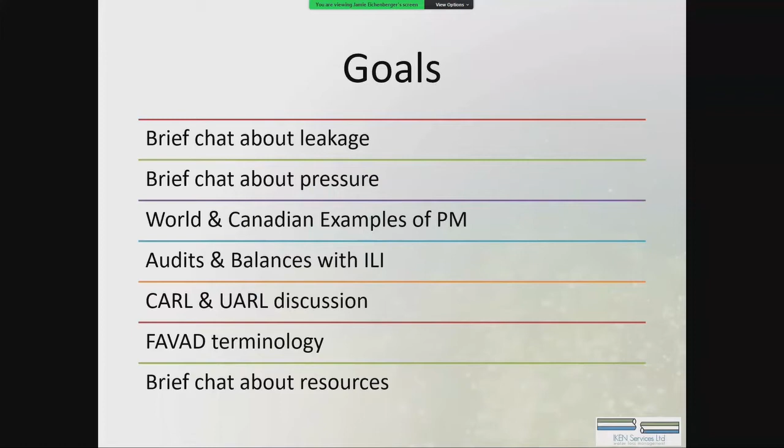CARL and UARL, again, more acronyms. If you look at your handout, I've given everybody a cheat sheet so you can follow along if I start talking too quickly. FAVAD we'll get to, as I say, a little later into the conversation. At the end, I've got a list of resources that I think you'll find quite helpful. I'm going to try and fly through this as quickly as I can. So instead of us having a bunch of question and answer throughout, maybe we'll just go to a midpoint or an endpoint and cover off questions.

So let's quickly look at leakage and try and understand what we're talking about. Generally speaking, if we're looking at a consultant like myself, we're usually talking about underground pipeline leak detection. What I want to point out is above ground, below ground, large leak or small leak, it all falls into a category of leakage. Whether they're findable or unfindable often depends not only on the user, but usually the equipment or the materials we're working with. And it gets very complicated with the new materials we're sticking in the ground.

There is argument about naturally occurring and man-made leakage, and regardless, leakage is leakage. But what we are finding is that there are examples of poorly installed or improperly installed pipe, and there's also a lot to be said for some naturally occurring situations.

I remember a project in Manitoba and Winnipeg in the middle of winter. The cast iron water mains had the frost go quite a ways past it. And as the frost worked its way out of the ground, it was creating something in the neighborhood of 400 leaks a month in the early spring. Frost heaving pipe out of the ground. Those leaks were usually easy to find because the back of the cast iron was breaking.

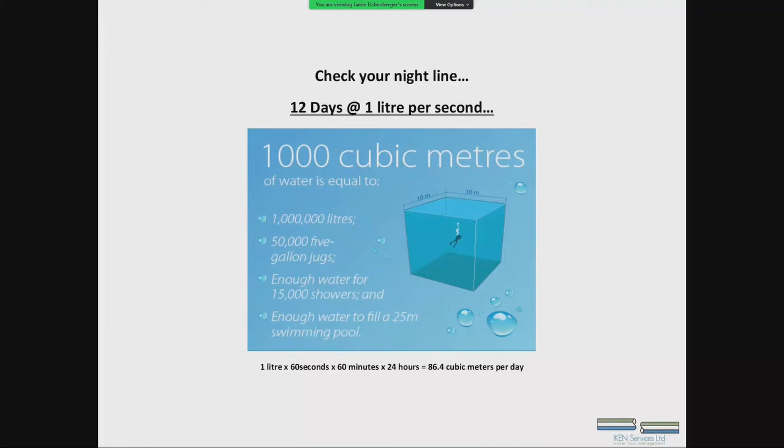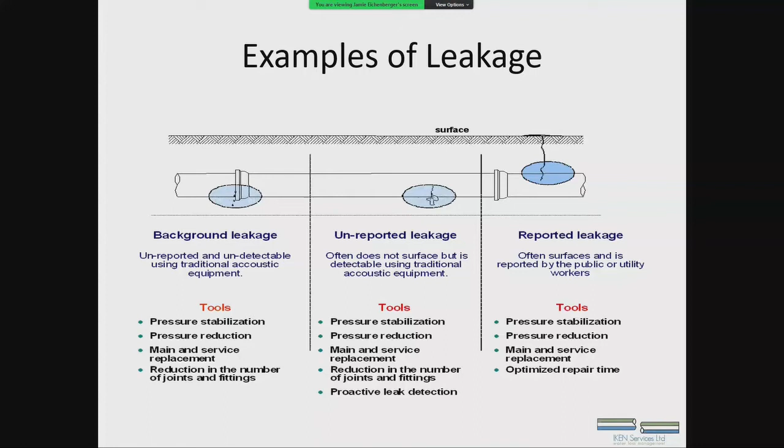If you take a look at the tools we have at the bottom to go at mitigation, in every instance, if we do some work with pressure, we're going to gain some ground on all categories of leakage. That's important to remember throughout this presentation. Thanks.

We often have in North America a fairly robust pressure goal, and oftentimes it's satisfying fire flow requirements and making sure that the pressure at the mayor's house is really good for a shower.

How much is too much? How much is a problem? How much is too little? And how do we control this pressure?

I know that in North Vancouver, we had some zones that were, I believe, 40 PSI at the top, and almost 130 PSI at the bottom. Big hillside communities are going to have to wrestle with that because their head pressure gets overwhelming. In Gold River, we had a couple of spots up by the water tower that were down below 40 PSI, and they needed to put booster stations in to keep people happy up there. Their system was controlled anywhere from 40 to 120 PSI. They had one small district down at the river at the bottom that had a PRV and did restrict pressures into their commercial district, but for the most part it was all head pressure off the reservoir.

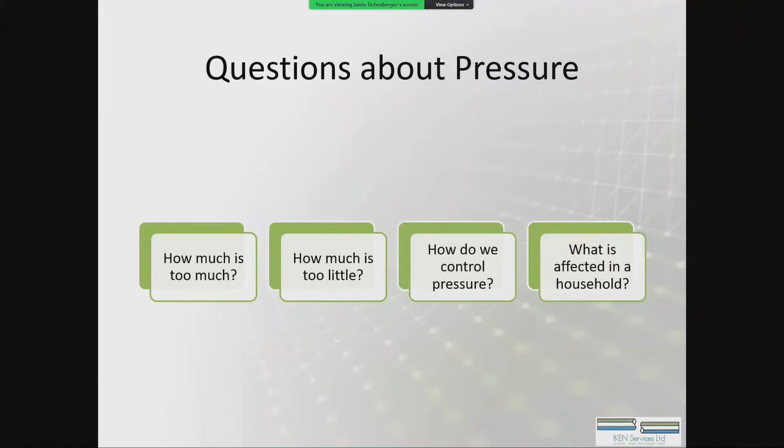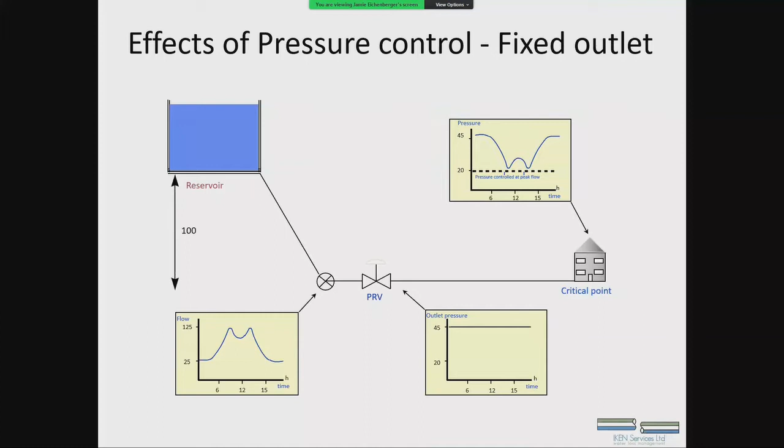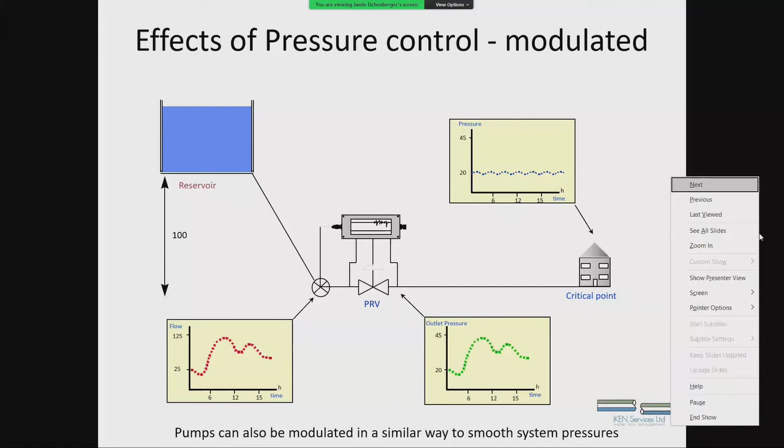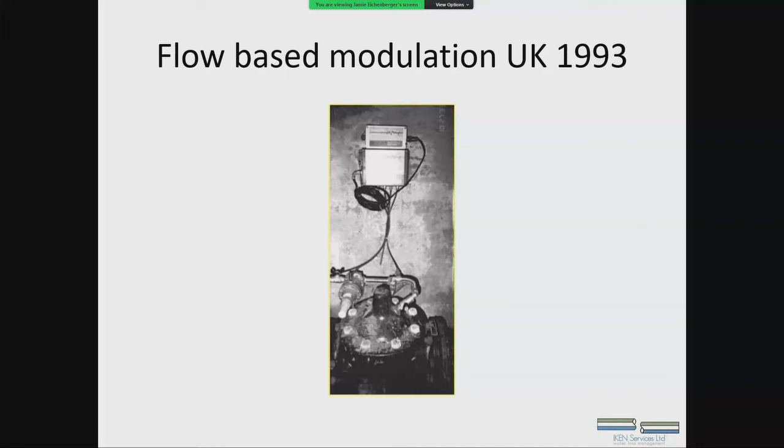I wanted to give you some history on this. Back in the late 80s, early 90s, the UK went through a multiple year drought, and they ended up privatizing the water systems. It turned out they had about 5 major water companies created, Thames Water, and what's the name of the other ones? I'm struggling to remember them, but they were trucking water to reservoirs because the systems were leaking so badly they couldn't supply water to every street all the time. When they privatized, they started looking at any alternatives they had to solve the problem, and the first thing they went after was turning the pressure down in the overall system.

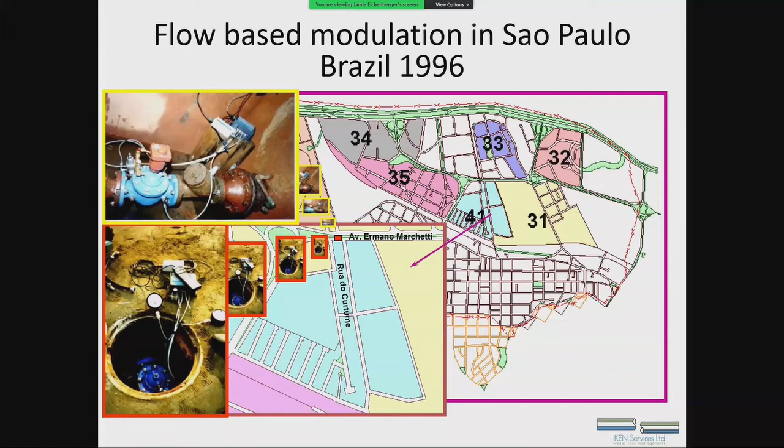The technology ran around the world, and we started putting controllers on a lot of PRVs. In some cases, Brazil for example, they had an astronomical amount of leakage, and they started applying these newfound technologies in a lot of their systems. One fellow I'd worked with at a consulting firm in Canada was a fellow by the name of Julian Thornton. These are some of his slides that I've borrowed, showing some of the work they were doing back in the 90s when we were learning what we could do to mitigate leakage.

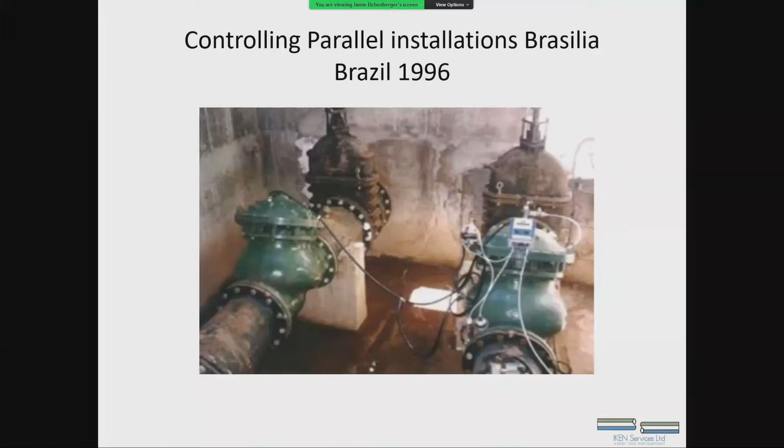The South African work was done with a buddy of Julian's, a fellow by the name of Mark Shepard. If you remember, probably 4 or 5 years ago, there was a countdown in Cape Town as to when their reservoir was going to run out of water.

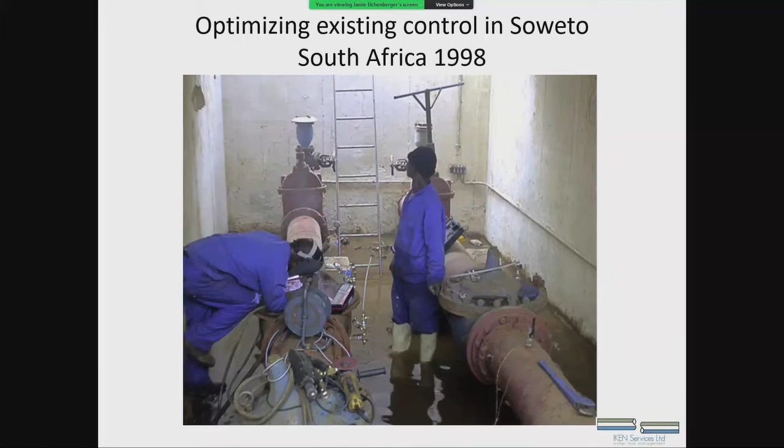The guy who rode in on the White Knight was Mark Shepard. What they did is they threw a bunch of pressure controllers on all of the PRVs going into Cape Town and gained a bunch of payback. All of a sudden we were getting down to less than 30 days, worldwide news, and then suddenly we didn't hear about it anymore. The big deal was that they put the pressure controllers in place and started reducing the amount that was going out through the leakage in the system.

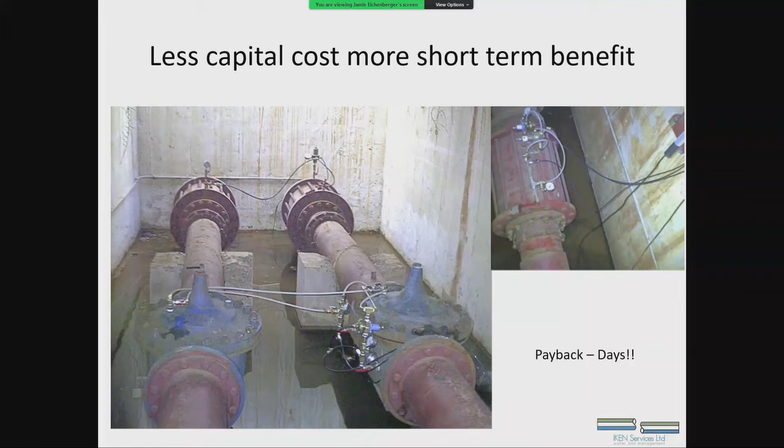This is an example of a water savings when they were just doing a test run to see how much they could turn the pressure down. You can see they took a 6-day period where they just notched it down a little bit, and just that little bit they turned the pressure down over that 6-day period saved them something in the neighborhood of 2.5 million gallons a day.

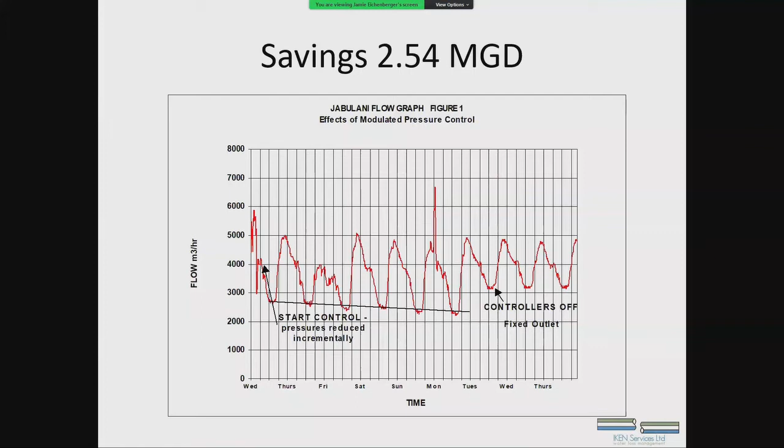Big systems though. This is another very big system down in Sao Paulo - 3.4 million gallons a day. It's nothing to sneeze at when the size of this zone is only about 63.7 kilometers with about 53,000 population, about 13,000 services. So it's not that massive, but it certainly was a big savings.

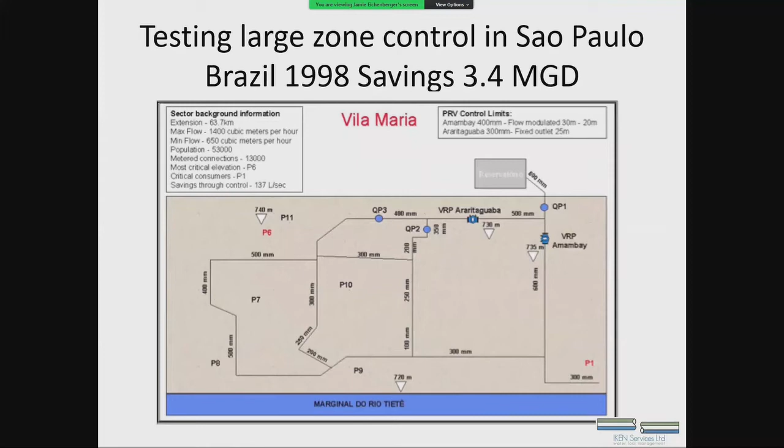That's my buddy Julian there on the right with laptop hooked up, and there's some of the PRVs that they were dropping in the Brazilian market.

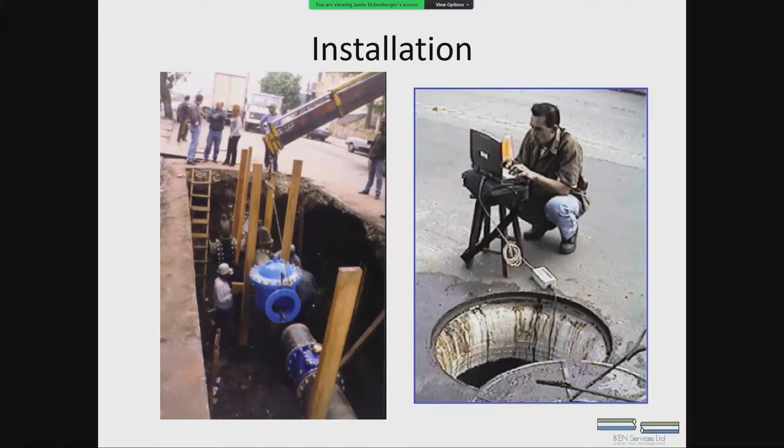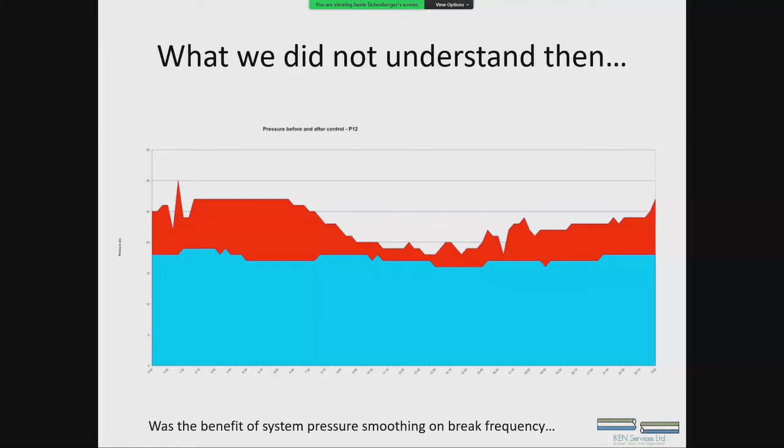One of the benefits of pressure management has proven to be how much it stabilizes the water hammer and peaks and valleys. The blue indicates after a controller was put in place, and you can see in the red there are some peaks which relate to water hammer, which ultimately leads to break frequencies. They were seeing a substantial savings in reduction in breaks. We're going to talk a little bit further down the road here about how this has become a more significant dollar figure savings than the actual water saved in the leakage.

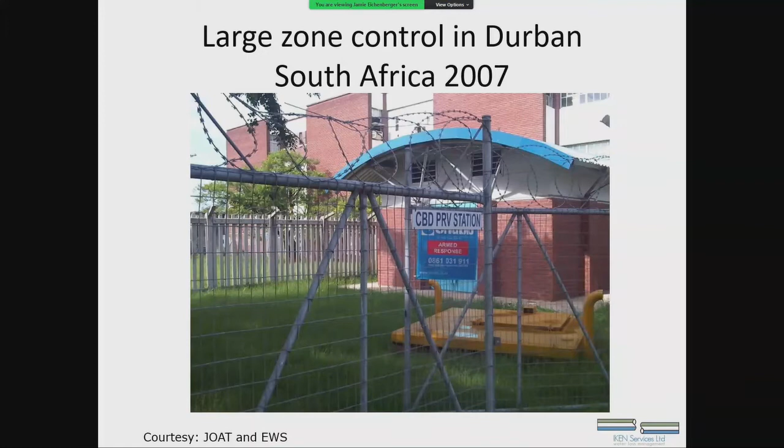And they put in a whole series of new stations like this, big PRVs with full control. There's my buddy Julian again on another laptop.

This is where they're using a remote node modulation, meaning they have a sensor at the critical node, which feeds back to the PRVs to help with the pressure outlet settings.

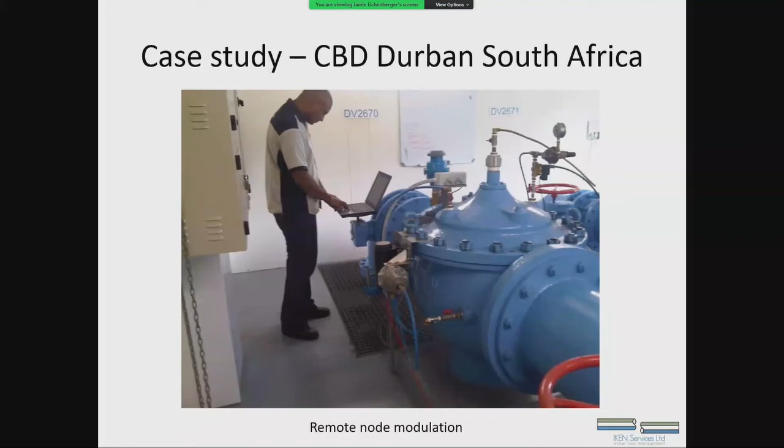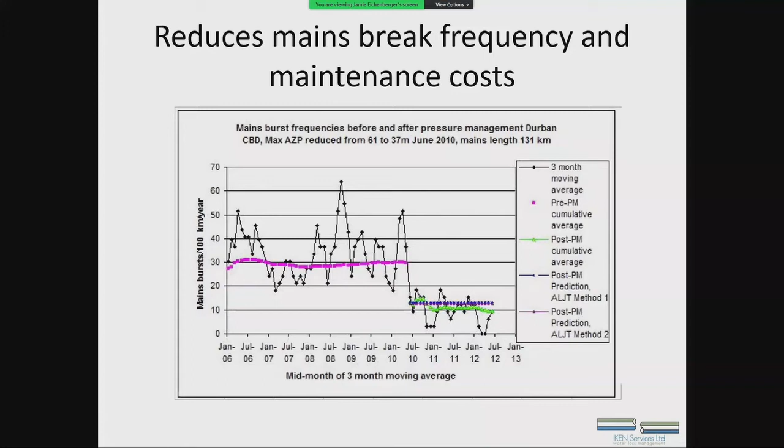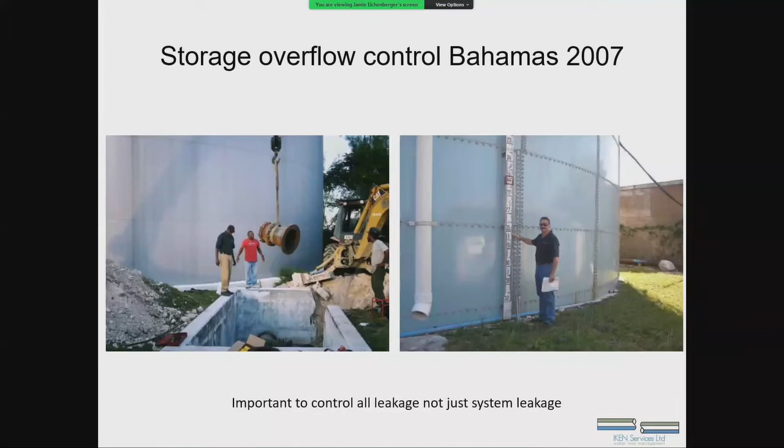Down in the Bahamas, Julian again there on the right, trying to figure out how tall he is. I guess the water had been pretty low in that reservoir. They were putting in flow controllers so they could make sure they didn't have storage overflow, and these big Venturi meters were coming out and PRVs were being put in.

Now we're going to switch over to Canada. The Halifax system has been at it for quite a while. They were learning from that IWA group. They had a fellow by the name of Ken Brothers who joined the International Water Association Water Loss Control Committee, and he started working very hard at implementing this because Halifax had just merged 3 cities.

They had brought Dartmouth, Central Halifax, and the outlying regional district all under one roof. They were looking to get a handle on the volume of loss they had, because now it was the regional district tying into these three joined cities, and they needed to get a cap on what was going out of that reservoir. Some pretty substantial savings.

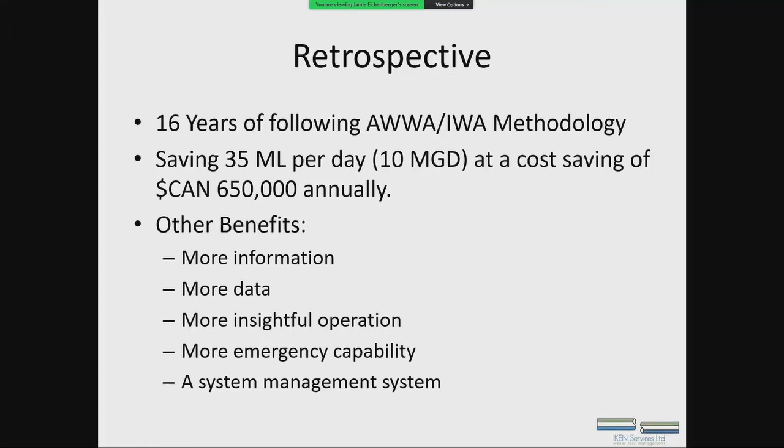And the best part, according to Reed Campbell who put this together, was the amount of information and data they were getting, and the way in which they could operate and manage their system better.

This is the kind of reduction they had in their infrastructure leakage index. They were dropping from as high as... one of them was quite a bit worse than the others, it still maintained that throughout, but they were gaining ground. When we get to the FAVAD discussion, remember that red line, that's the one that stands out quite a bit. But they were making progress.

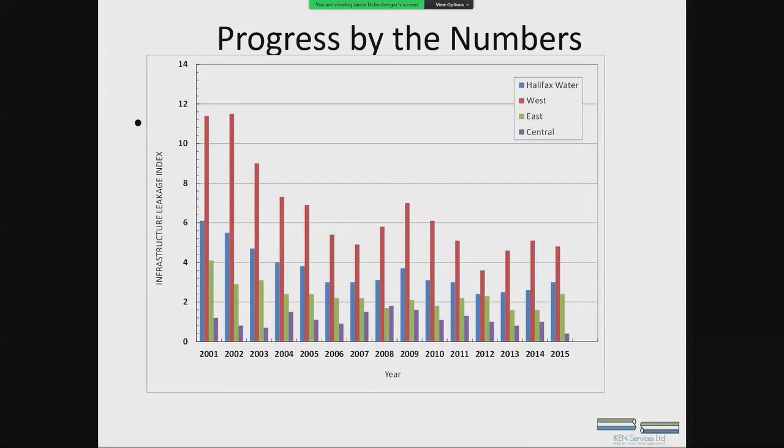They got to a point where they could get certain districts down to an ILI around 2.5. In layman's terms, if you're at 2.5, that means you're 2.5 times worse than a gold star. If you're at 1, you're getting the job done. If you're at 8, you're 8 times worse than you could be. The scale is usable in large and small cities throughout, and we'll come up with the same numbers.

ELL is a calculation we're not going to talk about this time around, but what Halifax was striving for was the economic level of leakage - based on how much their water cost and how much it cost to go out and mitigate water loss, they wanted to calculate what is the economic level of leakage and how low could they go.

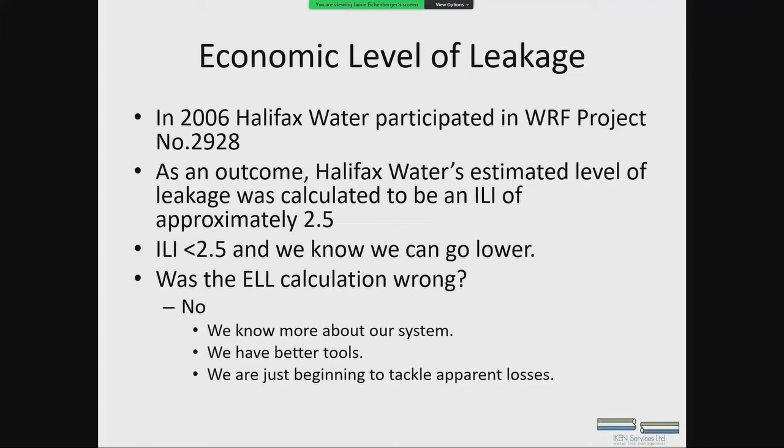The amount that they could go low was restricted before they figured out this terminology we're using called FAVAD. We're going to get to that here very shortly.

This is a project I did some work on with a group out of Toronto. East York is one of the 6 cities merged together into the city of Toronto, and it had 3 feeds off of their metro water line. The 3 feeds did not have any PRV controllers, just Venturi meters. The goal was to put PRVs in and control the flow into this system, which had maybe 54 kilometers of pipe, almost all cast iron or steel of some kind.

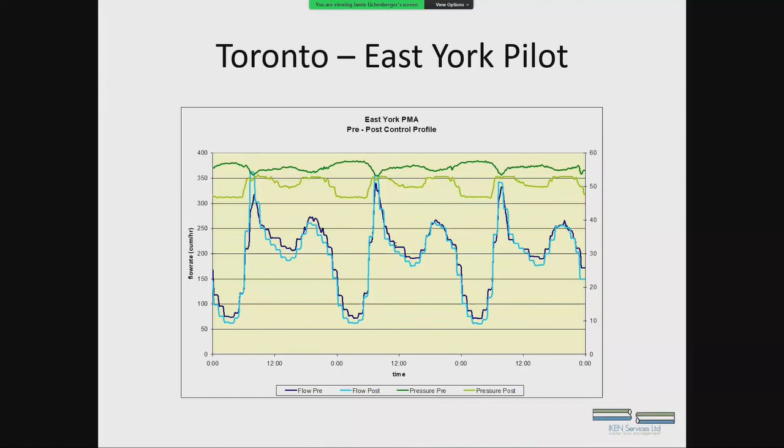5 years after this installation - before the installation, they were averaging something like 5 leaks per year on the mains, plus a myriad of service leaks. They went to 0 leaks on mains for 5 years. So we made a big difference on the cast iron in that system with pressure management.

I was involved in trying to get these big turkeys stuffed into the little chambers. We were trying to decide whether using the old chambers was a money saver for the city if we put all this technology into the old boxes. I got to tell you, it was all we could do to stuff that bad boy in there.

This is friends of mine up in Gold River. I go up about every 5 years to do a leak sweep, and you can see about every 5 years we seem to knock that January flow down pretty dramatically. We usually do it at the tail end of the year, October, November. One thing you can see is that within a year, this town tends to fight its way right back up to the same amount of leakage.

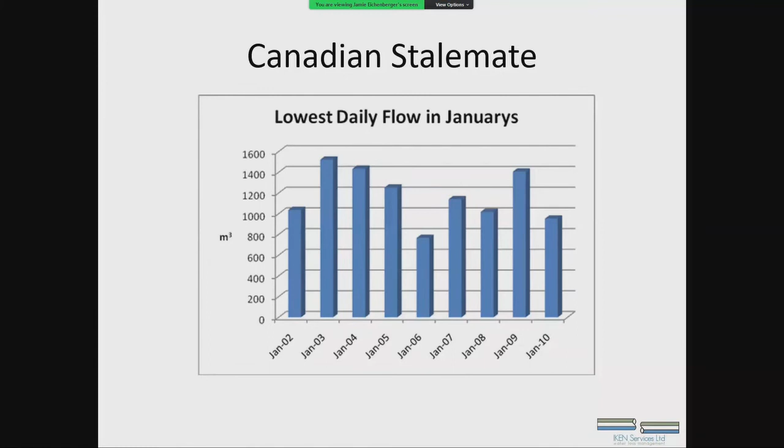So if we don't fix the leaks and then moderate the pressures, we're just going to have this stalemate where we go back to the same situation, leakage over and over again. If we can apply proactive leakage control with proactive pressure management, we're going to start to win the war.

If, for example, we could just bring that night pressure down, that might be a timed pressure that we would put in front of that PRV to tell it that we don't need maximum pressure in the middle of the night, then we can put a controller in that would do that.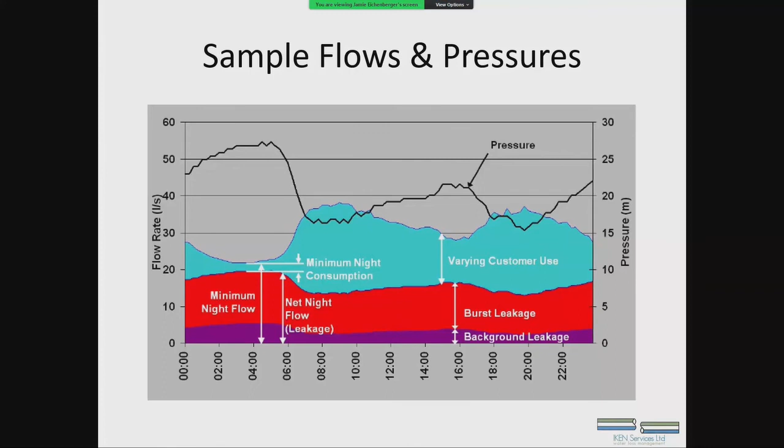So in your cheat sheets, you're going to see that we've been talking about the infrastructure leakage index. The next two that we're going to spend quite a bit of time talking about here is the unavoidable annual real loss, so that's purple, and the current annual real loss, which would be the red included with the purple. We're going to talk about district metered areas, pressure managed areas, and then we'll get to FAVAD here.

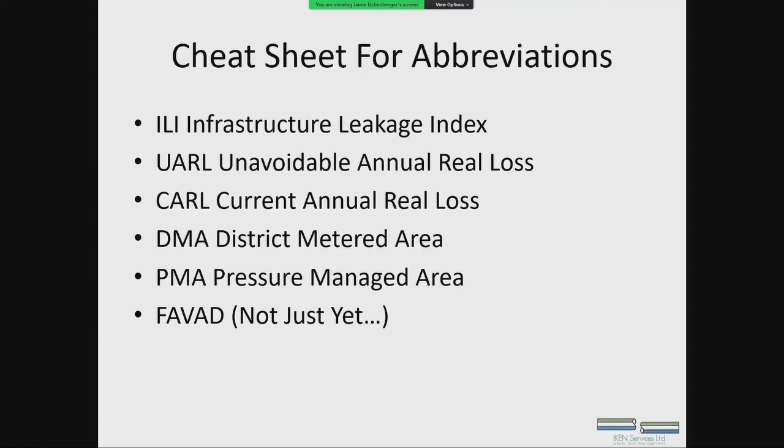I'm going to show you a water balance. If you look at the latest version of the M36 manual from AWWA, this is a representation of the data that you will fill in. So the system input volume, whether you're buying your water from somebody or whether you're manufacturing your own, you put that in one of the columns that gets split with authorized consumption

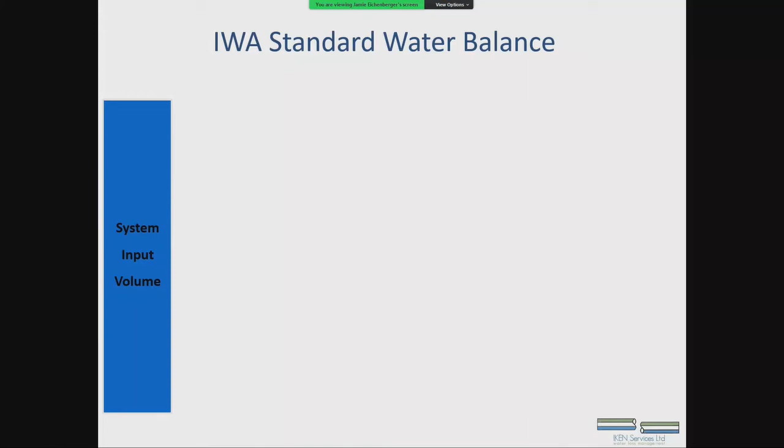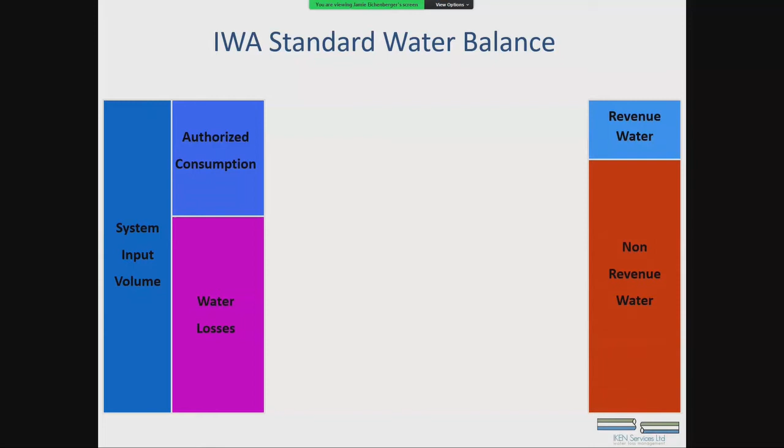or water losses. And what we're looking at is revenue water or non-revenue water. So our target is to create a smaller version of non-revenue water than especially what's in this diagram.

We have billed authorized consumption and unbilled authorized. I'll help you break those into categories here in the next round. Apparent loss and real loss.

If you can imagine, apparent loss is exactly that. It looks like it's missing, but it actually isn't. Real loss is where it's leaving the pipe. So let's have a look.

Billed metered consumption, that's pretty obvious. And then billed unmetered consumption. Now, we've got cities that don't have residential metering. We have cities that are fully metered, and it can be any combination of those two for this revenue water stream. Then we get to typically what's involved in the municipality itself.

Unbilled metered consumption, so whether you send the mayor a bill for what city hall uses, or whether we have unbilled, unmetered usage out in the ballparks and city parks, those are all authorized consumptions, whether they be metered or not metered.

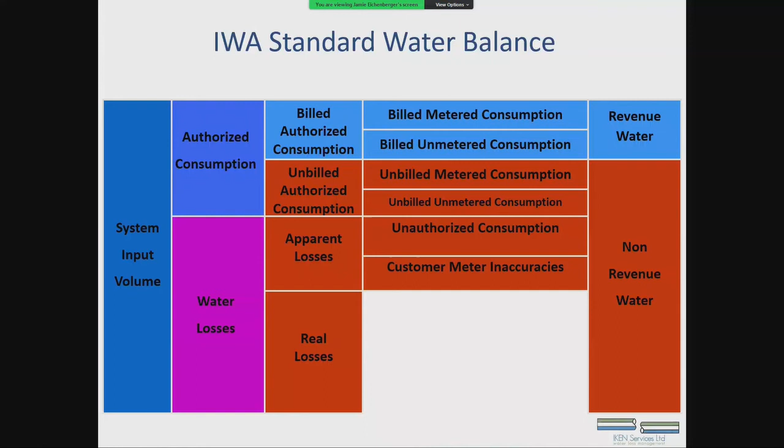And up until the point where we stopped using, well, we're still using some displacement meters, we had a lot of tired meters that would lose the bottom end. So low flows often didn't register in meters, and that falls into the apparent loss category. Unless we kept a metering program up to snuff, that apparent loss calculation got bigger and bigger.

And then this is the stuff that I've been chasing for many years. Leakage on the transmission system, leakage on the distribution, confirming that we have leakage at reservoirs. That became something we weren't aware of back in the day, where we'd shut off the reservoir and it would still drop in elevation. And we had overflows that were not measured into our calculations for real loss.

We weren't going to get paid for that stuff. Leakage on service connections up to the metering point. And if we didn't have meters, then that meant that a municipality is absorbing all of the homeowners' piping as well as their own. And that can become a big issue.

But that is a 100% breakdown of all the water that you use. And we put this into a yearly calculation.

There's freeware software available through AWWA. You can go online, sign up for it, and they'll send it to you for free. The newest version has an adaptation to FAVAD, which we're going to get to here in a sec.

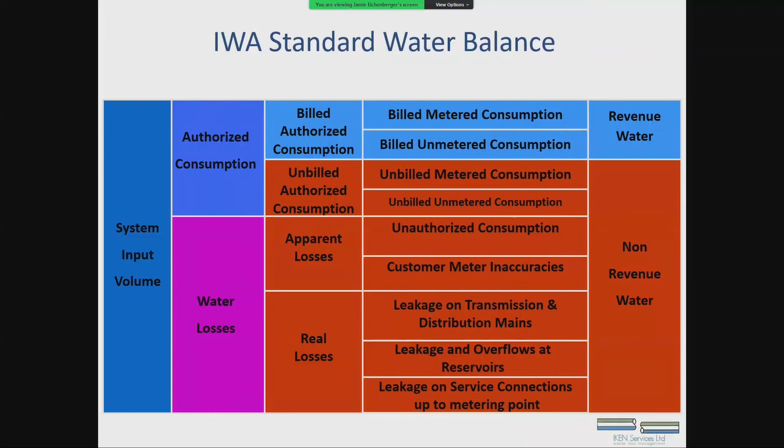If you'll notice, it's very hard to read the center of that blue box, but it says current annual real loss. What we have is a box with 4 ways in which we can lessen that current annual real loss: pressure management at the top, active leakage control, pipe replacement/renewal/rehab, and then speed and quality of our repairs. If we repair it and then have to come back and repair it again on the same repair, that's not closing the blue box down much.

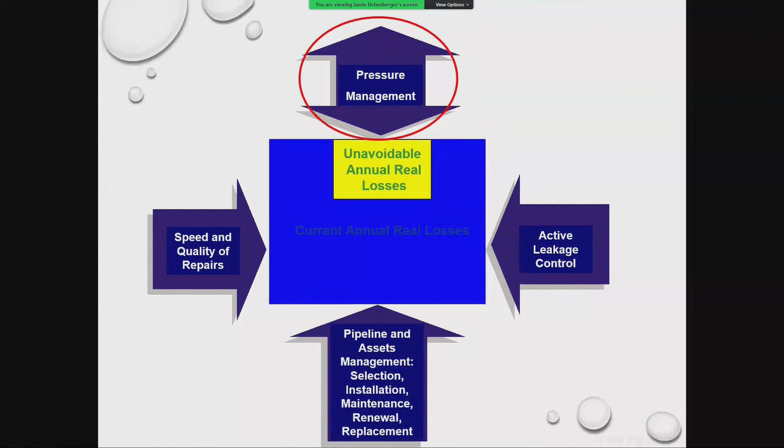But what you'll notice is the pressure management has the unavoidable attached to the top. If we turn down the pressure, the unavoidable leakage that we can't find will lose less water. Both the leakage rate that we have and the unavoidable leakage rate that we have will both be benefited by turning down pressure to make this box smaller.

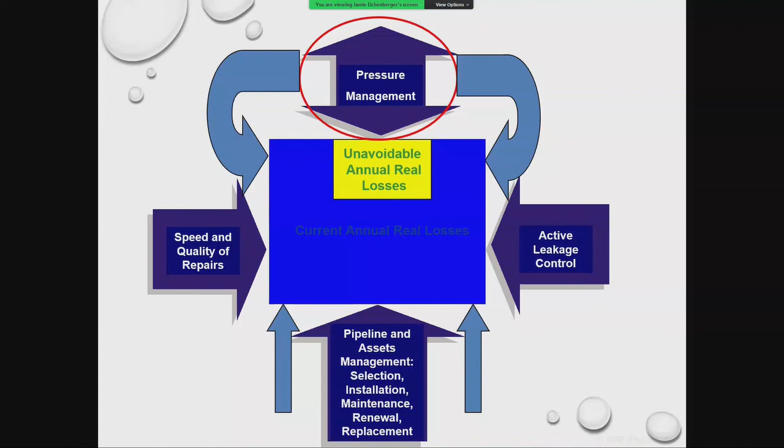And then we can apply the other 3 as we see fit. That's where Halifax realized pressure management. I think they have something in the neighborhood of 37 pressure management zones in their effort to eliminate leakage. They apply all 4 of these arrows, but apply pressure to all zones, and then the other 3 arrows are as they see fit after turning pressure down on all of them.

Unavoidable annual real loss is a calculation that's been refined by doing this. We take a look at the mains length, the number of connections, and then the third one is the tricky one: length of underground, whether it be private or to the curb stop. That depends on where your meter is, or if you have a meter.

In the prairies, of course, the meters are often inside the houses. In Vancouver and Victoria, they're all out at the curb. So we can refine the measurements for the unavoidable by looking specifically at your system, measuring all of these things, including the average zone pressures.

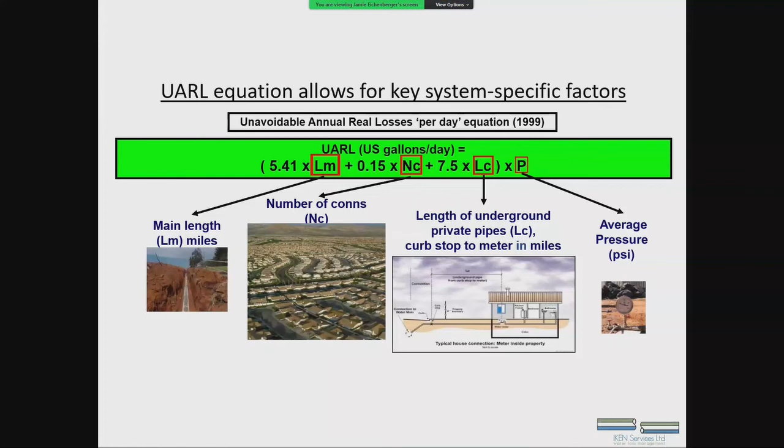But when we have flexible pipe, imagine that crack with more pressure - the area that opens up to discharge increases. So what they've figured out here in the last few years is that they have to put a different calculation in if it's plastic or flexible pipe. They have to put a P1.5 versus a P0.5 in the calculation for determining the volume of loss.

So that's the sum of what you have in your system. As cities are growing, we're putting more and more plastic in, and we're starting to recognize we have to put a different calculation in for the volume of loss that we're not going to find in the unavoidable. Halifax jumped on this because it allowed them to recognize a lot of the districts where they weren't achieving something as good as 2.5, because they had a lot of plastic in that system, and they had to change the calculation so they could work in these smaller districts and refine it to chase the right areas for the right leakage.

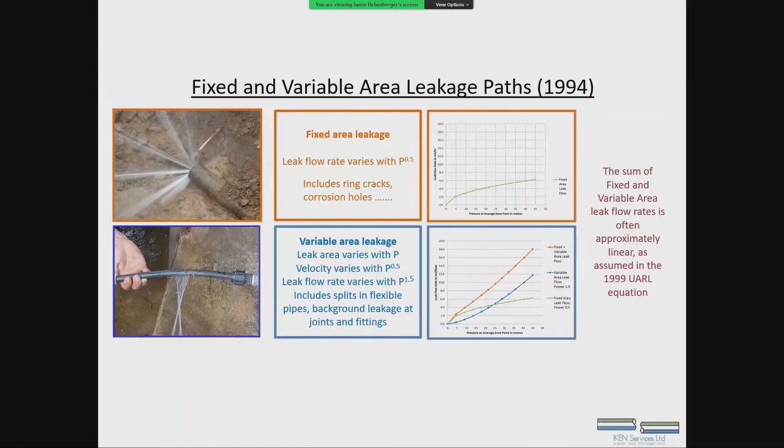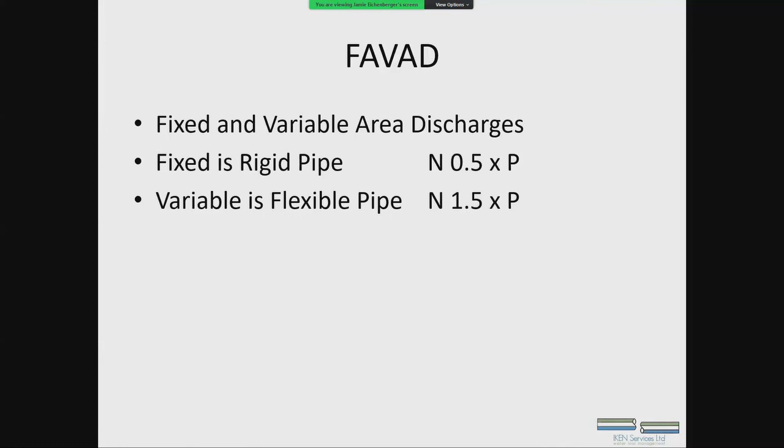So big deal here, and this is the terminology: fixed and variable area discharges are made up of how much fixed rigid pipe you have in your system versus variable flexible pipe that you have in your system. I was working on Black Diamond in Alberta, and we determined that they have 78% flexible pipe in their system. Pressure management is going to be a massive tool for them in their fight against the loss rates they have. So again, flexible pipe versus rigid pipe changes the volume of water that goes out as we turn the pressure down. That's the relationship between pressure and flow.

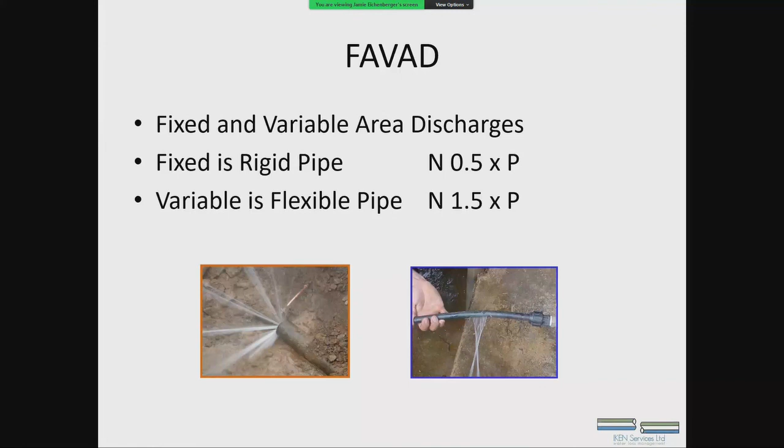Because we have put this FAVAD calculation in, we can now do any sized system. So if you have pressure zones that have less than 5,000 services in them, 3 years ago the AWWA ILI calculations wouldn't work for you because that would be too small for them to do the calculation - it's too close to the end of the bar graph. What we need to do now is look at small pressure zones individually, and we can get this UARL and CARL calculation for each zone in your system.

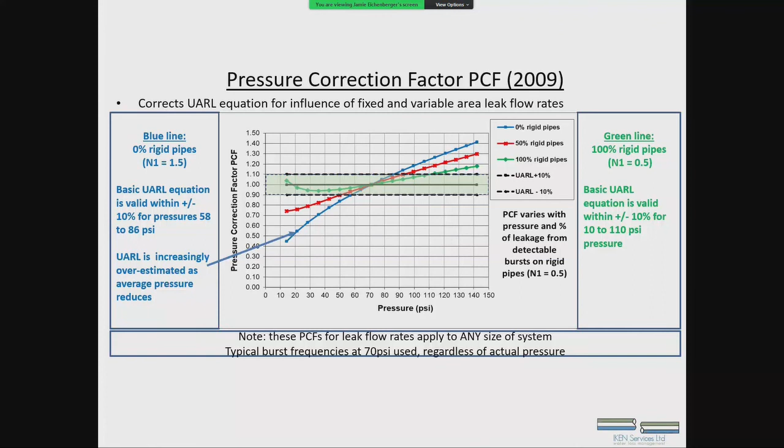All right, here's what we can do. Have a look at your system, have a measurement, get a calculation done off your GIS to see what is rigid and what's flexible. Guesstimates are okay, but the more refined the better. Measure where your critical nodes are. The model will tell you one thing, but you may want to go out and put some pressure loggers in the field just to confirm it.

Understand what your PRV or head pressure is and what those fixed outlet pressures are. And perhaps you do an experiment like that 6-day experiment that we did down in Brazil.

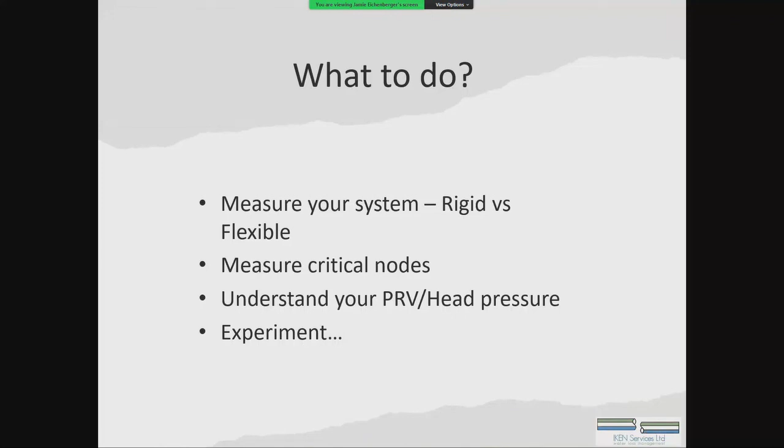I have put this in your handout - LEAKSSuite Library is a culmination of all the stuff that Alan Lambert had put together. That's on his website. The WLR&A, which stands for Water Loss Research and Analysis, is a combination of Alan and his daughter Kate that are keeping the information out there and available.

AWWA have just put out a new M36 manual, and that has the ability to apply the FAVAD. And then I've linked my website to Alan's website, and I've actually got all of his online training available through me for the Canadian market.

So what I'd like to point out, anyone that's interested in getting any of the 3 online training that we have available - anybody that's attended this just needs to contact me, and we will come up with a way for you to get involved with the Water Balance Essentials, which is the first of a group of 3.

I also have the NRC FCM manual for water loss. National Research Council teamed up with the Federation of Canadian Municipalities in the early 2000s, and I think they completed this somewhere between 2005 and 2007, and then promptly shut their website down, I think in 2008 or 9. Luckily, I printed off the best part for the water loss management, and I have that available and can forward it out to anyone that would like to see it.

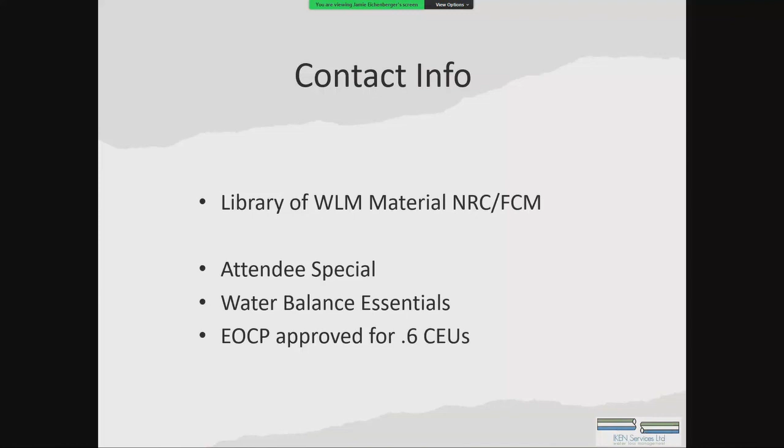So EOCP has approved the Water Balance Essentials for a 0.6. Typically it's going to take you about 5 days on your own time, but lots of really good information that I've skimmed over here today. I'd like to thank you, and hopefully I've kept it on time.

Yeah, thanks so much, Jamie. That was great. Just one quick question about relining pipes, like with CIPP, to help reduce loss - is this a Band-Aid, or does this cause problems down the road, was what the question.

Nope. There's lots of room for rehab to work at mitigating pipe leakage. There's a lot of good materials out there now that are making a difference. I know that the CIPP has really done most of its time on the sewer side, and one of the tricky bits with pressure pipe is making sure we get a really good, clean cut in with services. But it has merit for sure.